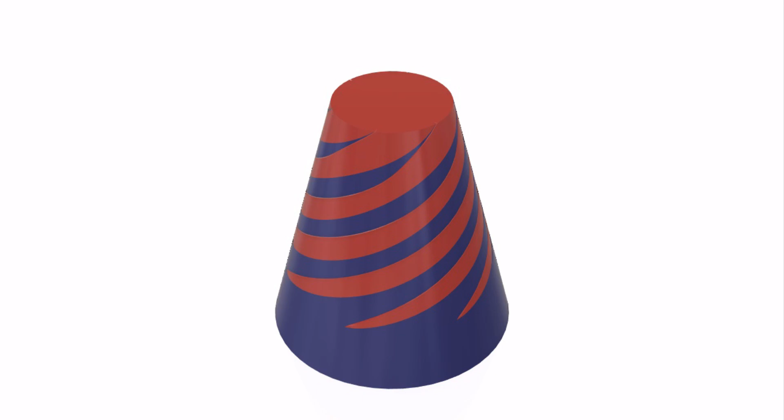We'll start by designing a fidget cone for 3D printing and finish by creating this simple animation. Keyboard shortcuts will appear in the bottom left corner as they're used.

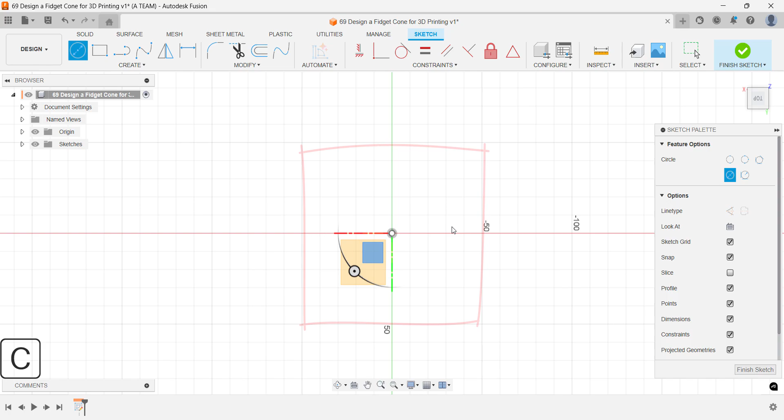We'll start this Fusion project with the center diameter circle, sketched around the origin on the predefined horizontal construction plane. The exact dimensions aren't critical. You can use your own if you find my 80mm base too big or too small. Save time by going straight from the sketch environment to the extrude command without closing the sketch.

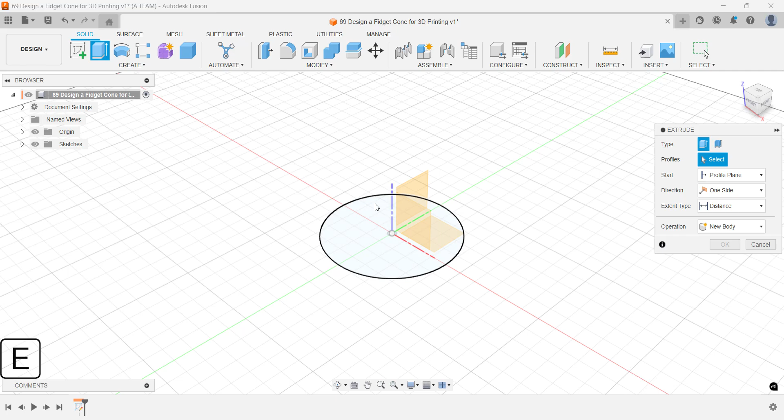I'll extrude it 80mm and set the taper angle to -15 degrees so it narrows inward. I'm not focusing on perfecting the top design at this stage. We need 2 copies of this body, both positioned in the same spot. Using the usual copy-paste shortcuts in the browser works perfectly. Just paste and press Enter to confirm without moving the body.

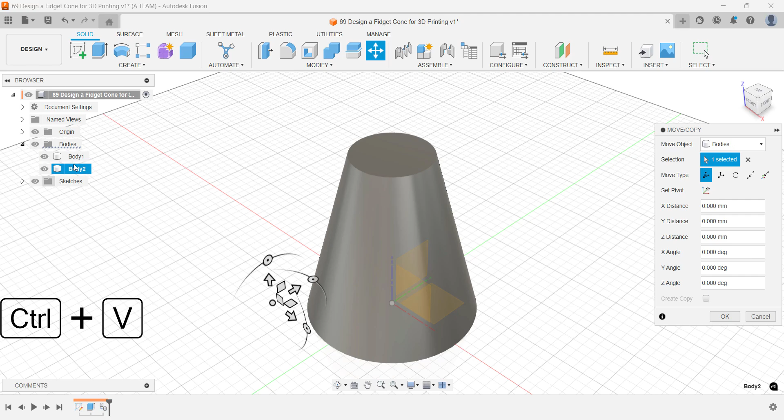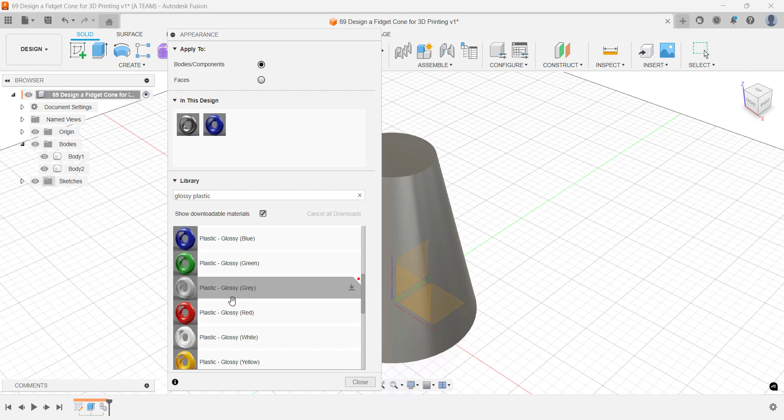Having 2 identical bodies in the same spot increases the chance of mistakes. So I'll apply 2 different glossy plastic appearances to make it easier to follow visually. Adding the colors through the browser saves time, as both bodies are in the same place. I can apply appearances quickly without the need to show or hide bodies. Body 1 is the blue body and body 2 is the red one. We'll keep body 2 hidden and continue working on body 1.

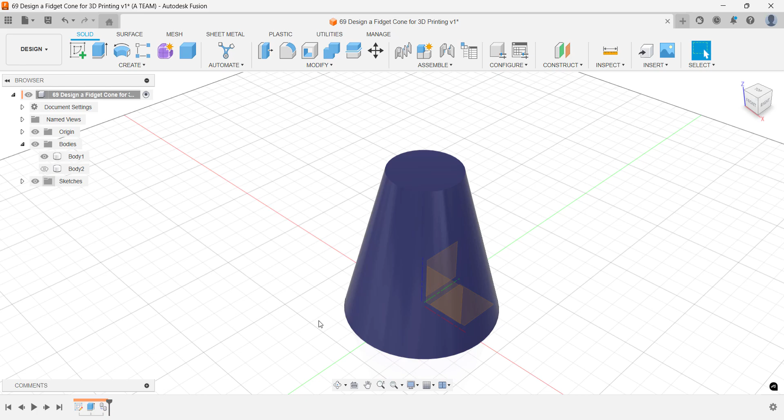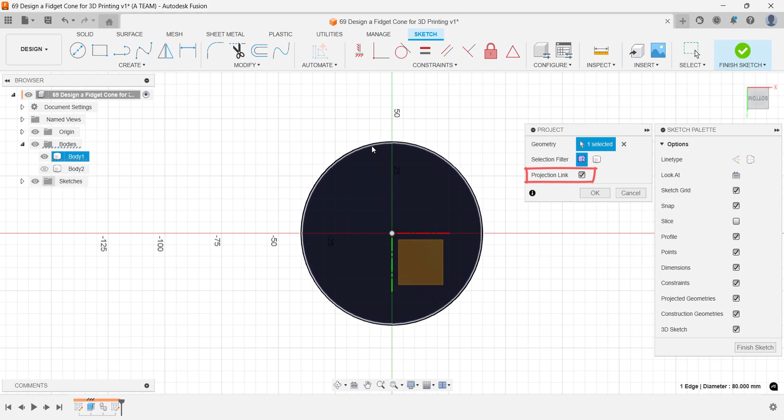We'll continue working on the bottom of the design. I'll create a linked projection on body 1. This way, if we update body 1, the earliest body in the timeline that body 2 is based on, the projection will update automatically. Projecting the boundaries from body 1 isn't strictly necessary, but it helps keep everything connected and makes it easier to locate body 1's exact boundaries.

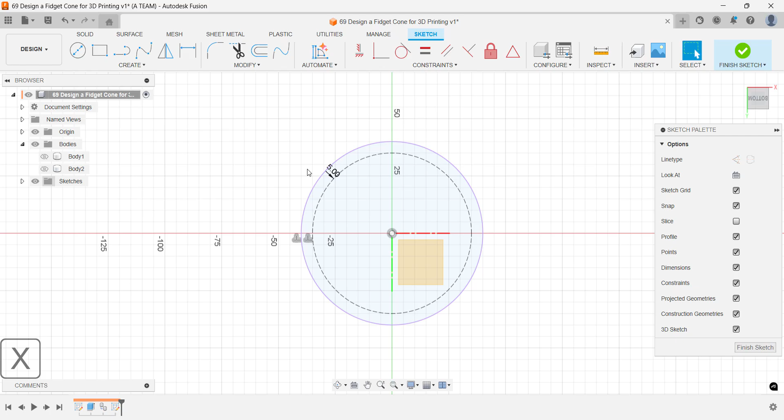We're offsetting this projected sketch by -5mm to keep our next closed sketch profile from reaching the edge. Otherwise, it would remove too much material later on. You'll see why soon. Since this offset circle isn't part of the actual design, I'll select it and turn it into a construction line. Think of it as a guide that doesn't affect the 3D geometry.

We need guidelines for our upcoming sketch that will cut through the fidget cone. Start at the origin and sketch them outward. The length and angle don't matter yet. Once the lines are in place, you can dimension them either with an angle or using a formula. This is a design choice. I'm dividing my circle into 12 sections, which gives me 30 degrees per segment.

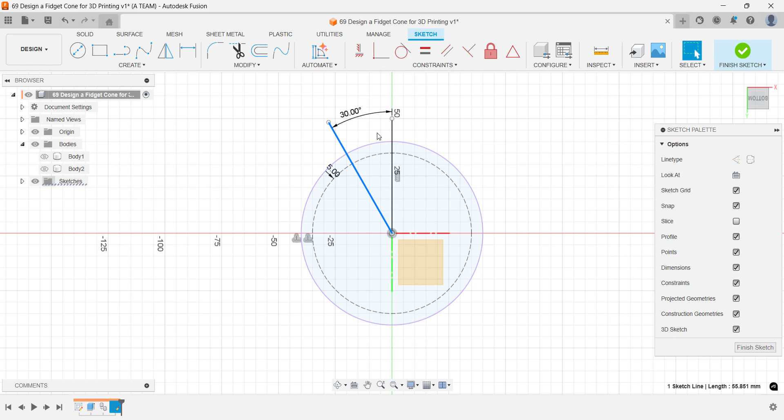Since these lines aren't part of the final design, I'll turn them into construction lines. As usual, I prefer using shortcuts, but you can also find the option under the line type setting if you'd rather click. Now it's time to get creative with a fit point spline. I'll share some key tips, but I won't spend time perfecting or fine-tuning the sketch. No one sticks around to watch that part.

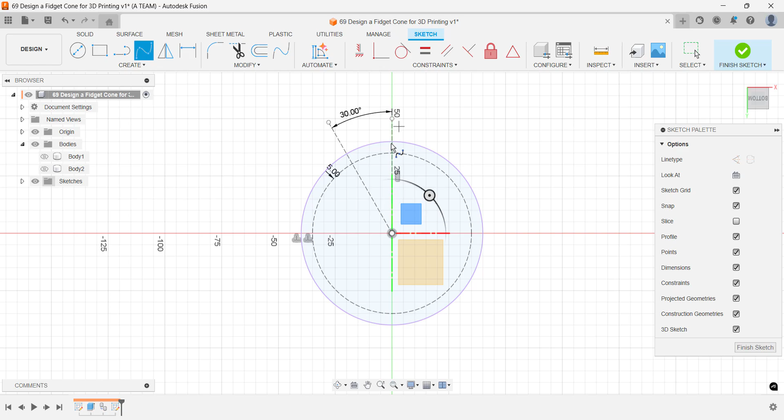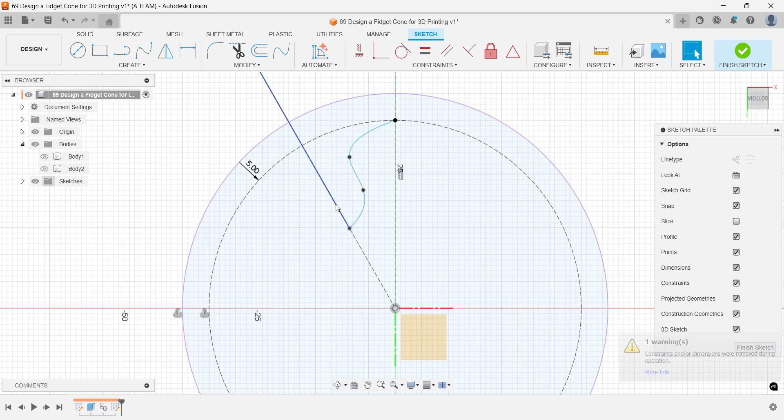We'll start by roughly placing the spline, then break the construction line on the left side since part of it needs to be part of the closed profile we're creating. The break command suggests a good breaking point and will convert that segment into a regular line. And yes, some of you might be thinking it was unnecessary to turn the left line into a construction line in the first place. That's true, given that we deleted the part we didn't need.

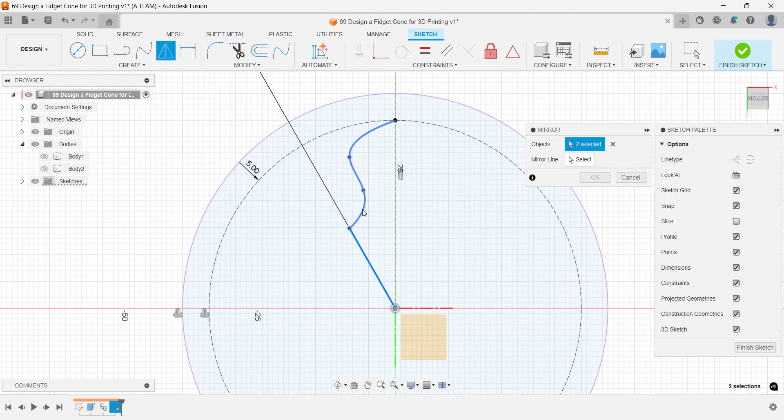Use the mirror command in the sketch environment. Select both the line and the spline as your objects and use the vertical construction line in the middle as the mirror line. Once you press OK, you should have a closed profile. The nice part is you can adjust the entire sketch, including the mirrored side, just by editing the original line and spline.

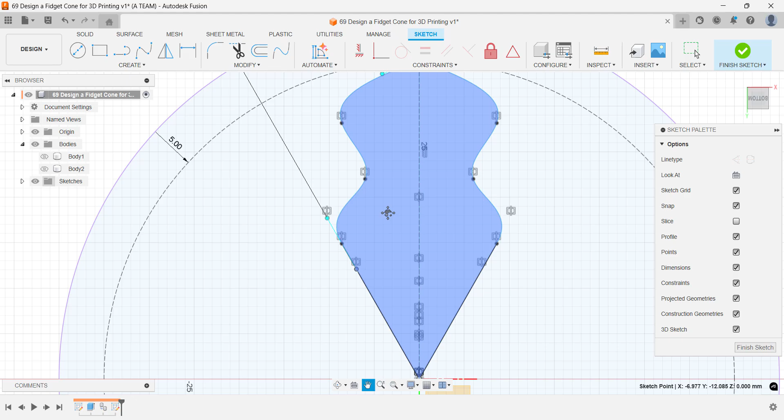One thing you should definitely be aware of is the ability to adjust the spline curvature using the green handlebars. This tool is intuitive and fun to use, allowing you to keep the number of spline points to a minimum while still maintaining plenty of flexibility.

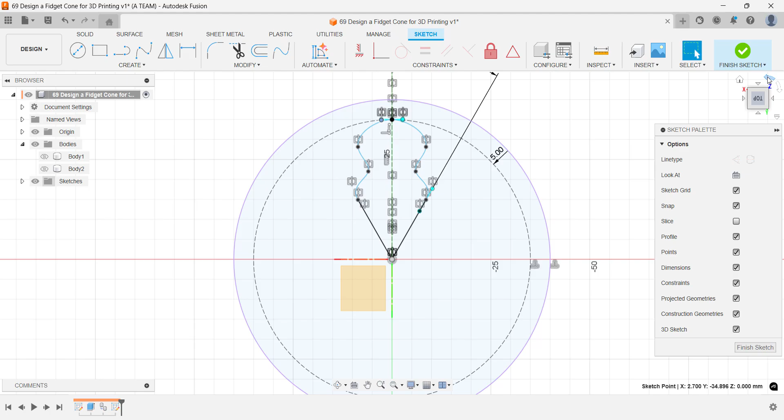You're on the right track if you have a projected circle linked to the original cone body, an offset inner circle turned into a construction line as a limit for your sketch, and a closed profile that resembles the one we're aiming for. We need a line with the same height as the cone for upcoming commands.

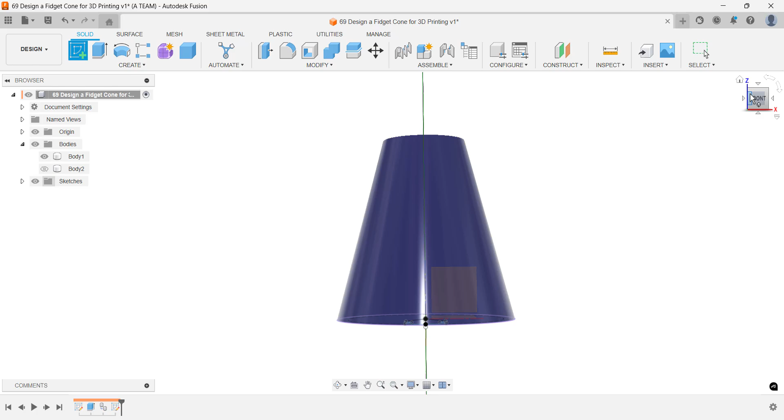I'm setting it to 80 mm, the same height as the cone, but it's not linked to the cone, meaning future changes would require adjustments in different parts of the model. While outside the scope of this tutorial, it's worth mentioning that incorporating user parameters into the design would allow us to update multiple parts with minimal input.

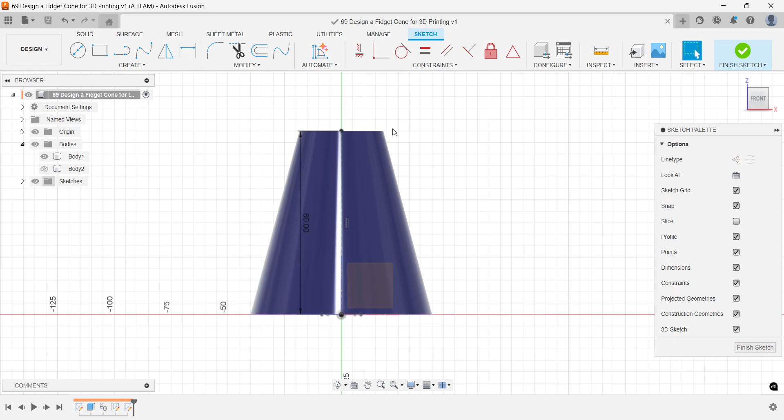I'm turning this line into a construction line out of habit since it isn't part of the design, but in this case, it doesn't make a difference. You'll achieve the same outcome if you leave it as a regular line. This is the perfect time to save your project just before we dive into advanced modeling commands. Use the solid modeling sweep command to sweep a closed profile. Simply select the mirrored profile and then your newly created line as the path.

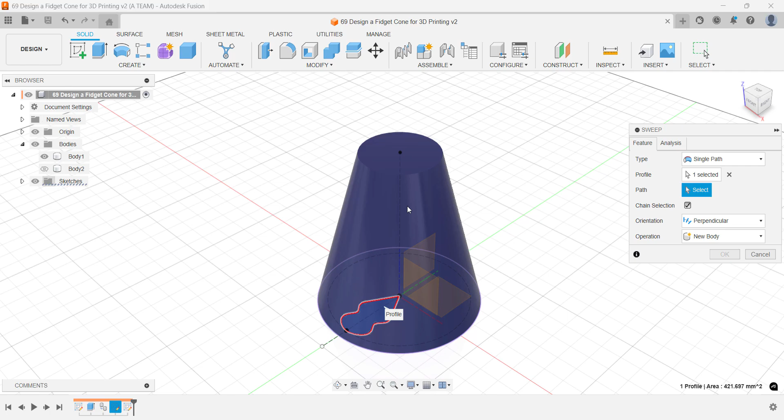The cut operation is what we want, but you'll also need to set a twist angle. I set mine to a full 360 degrees, but feel free to experiment with different solutions as you perfect your fidget cone. The profile only starts cutting through the edge of the cone once we reach a certain height. This is why I didn't create a closed profile that extends all the way to the edge of the projected

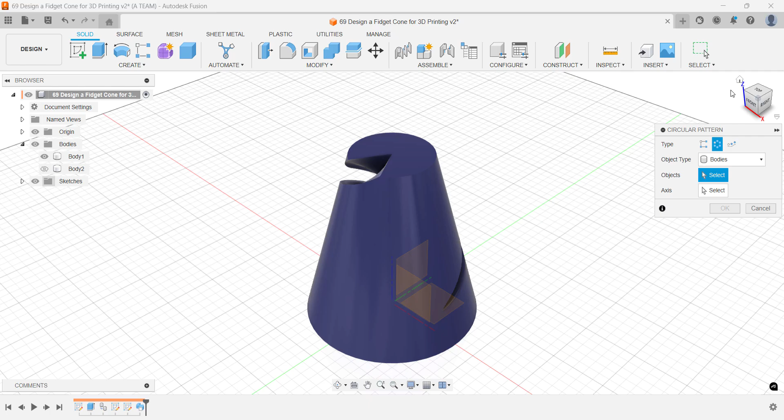line. The 5 mm distance used in this tutorial isn't optimized. The focus here is on the overall workflow. You're encouraged to try different dimensions and see what works best for you.

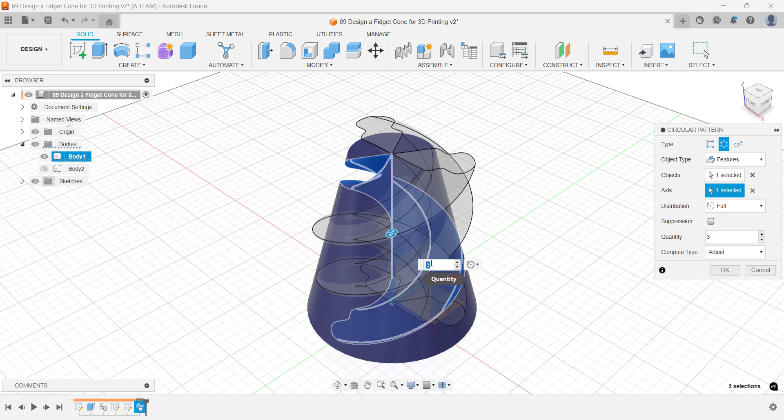Use the blue axis or select the vertical line in the middle of your body by clicking the edge with your left mouse button when the small menu pops up. I'm setting my quantity to 6, but I've seen other tutorials where different quantities are used for fidget cones.

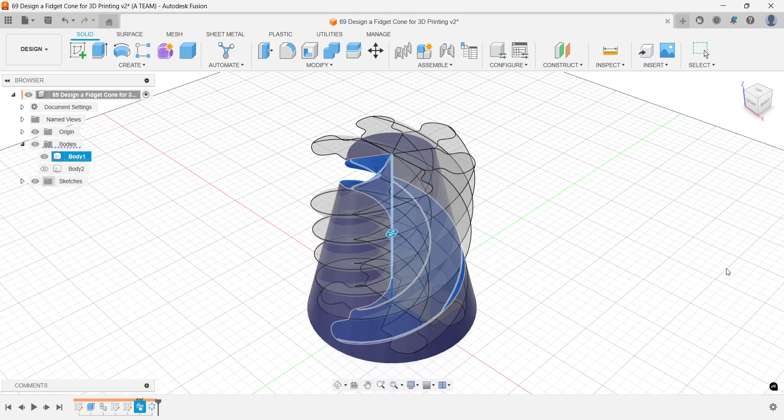Your computer might take a little time to compute this complex sweep cut operation and evenly distribute the circular pattern around the model. This is why I recommended saving earlier. Depending on your computer's capabilities and the complexity of the model, heavy computations can increase the risk of a crash.

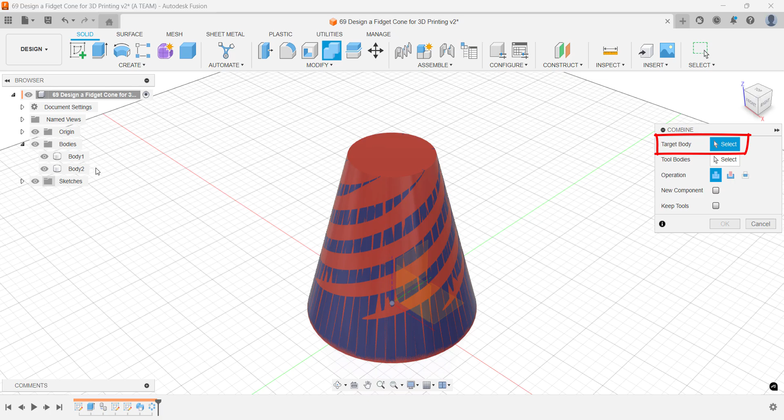When you turn the visibility of the red body 2 back on, you'll notice conflicting areas in the geometry. Specifically, the red striped red and blue regions overlapping. To resolve this, use the combine cut operation. Set body 2 as the target body, since it's the main body we're modifying.

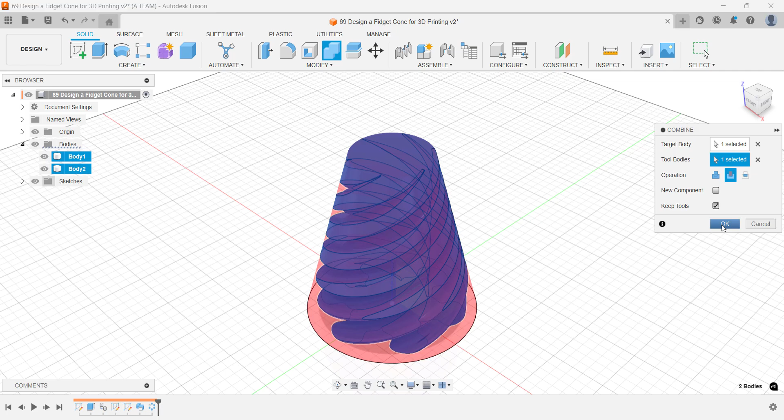Body 1 will act as the tool body, as it has more developed geometry compared to the original cone. Make sure the operation is set to cut, because we want to remove material. Also check Keep Tools. We want to keep body 1 as part of the design. Once applied, the overlapping areas should be gone.

However, you may still notice that body 1 and body 2 fit too tightly. For proper assembly or function, we will introduce small gaps between them for clearance. I'm saving my project at this point to have a version backed up before performing this operation.

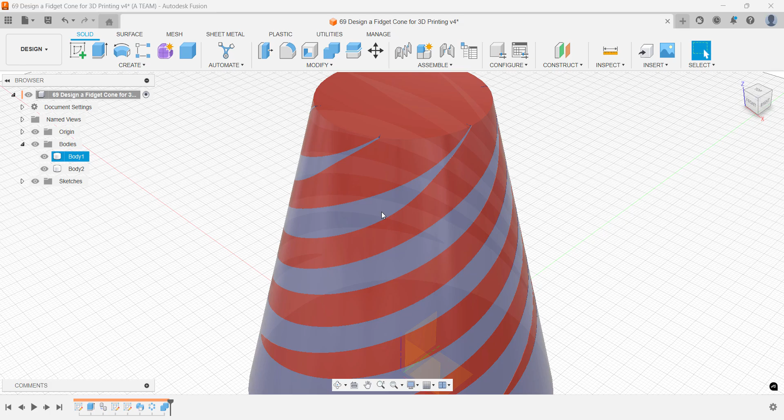We're doing this because we need a small gap between the red and blue bodies. If you look closely, you'll notice they're currently too tight due to the previous steps. To fix this, we'll hide the red body again and start a press-pull operation.

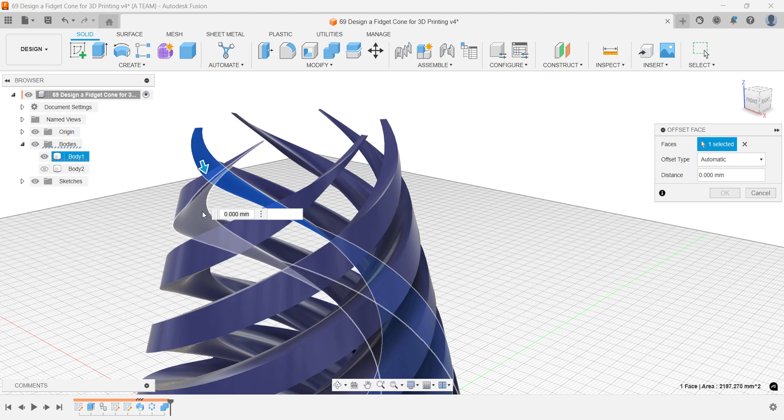Here, I'm selecting just one side, but the exact distance you choose depends on several factors, like your design, your 3D printer, its settings, and the materials you're using. Be sure to check from different angles to ensure you've selected all necessary areas before applying the adjustment.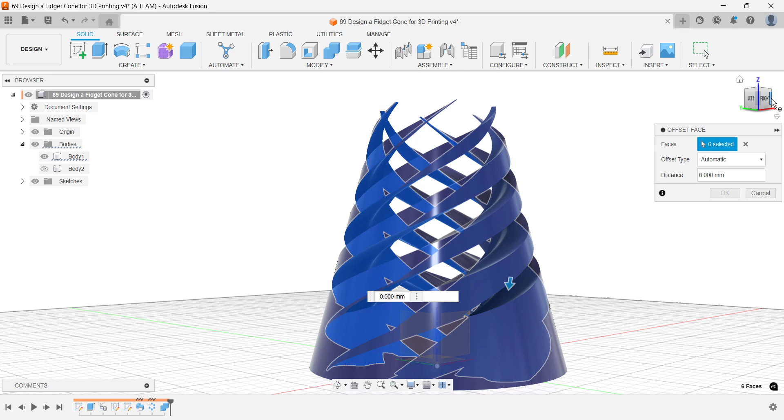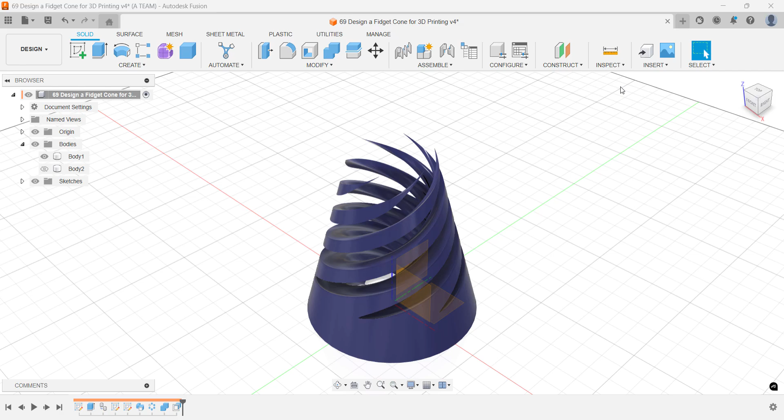I'm setting the clearance to negative 0.2 mm and you'll see the complex computation begin right away. This computation took about a minute on my system, so we'll skip ahead and continue with the 3D modeling. Turn the visibility of body 2 back on and inspect your model. You should now see a small clearance between the parts, giving the bodies a better chance of fitting together properly.

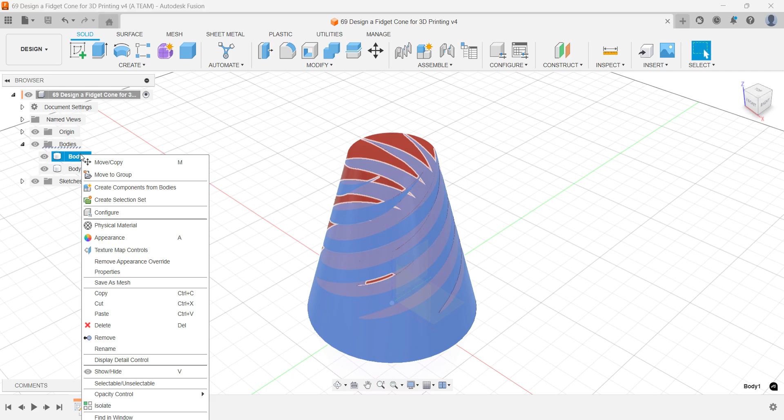Next, we'll convert both bodies into components and animate them in the animation workspace. A quick way to do this is by selecting each body in the project browser, then right-clicking and choosing Create Components from Bodies from the context menu.

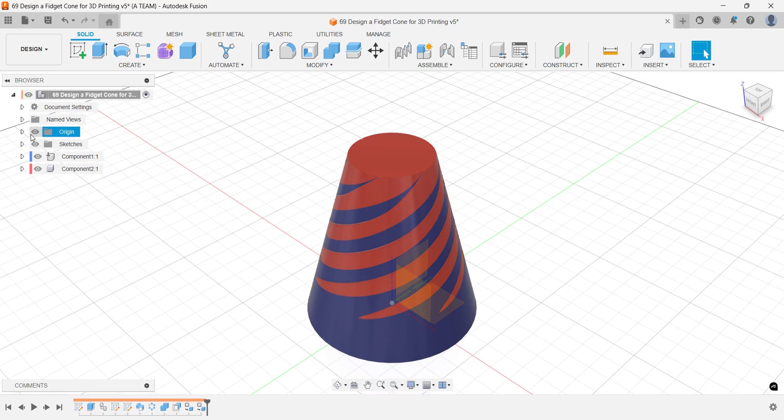The settings carry over from the design workspace to the animation workspace. Since I don't want the origin to be visible, I'll quickly jump back to the design workspace and turn off its visibility. The animation workspace is straightforward and we'll keep things simple in this tutorial.

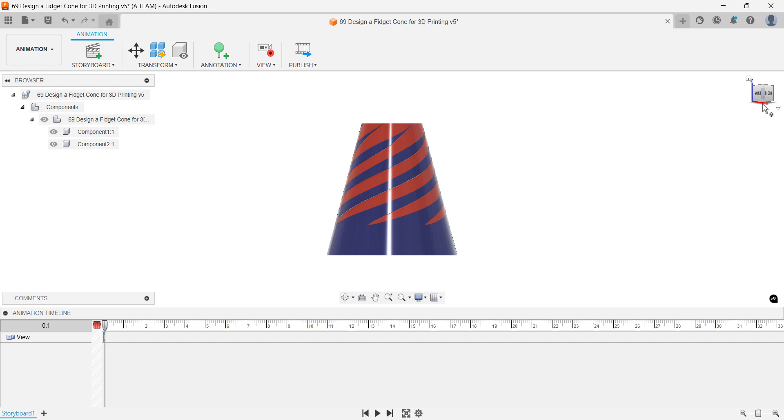We'll begin by setting the camera angle for the start of the animation. The recording will start from this angle. Next, I'll set the duration for the first action. I'll set it to 10 seconds. The animation starts with the initial camera angle and ends with the updated camera position after setting the duration.

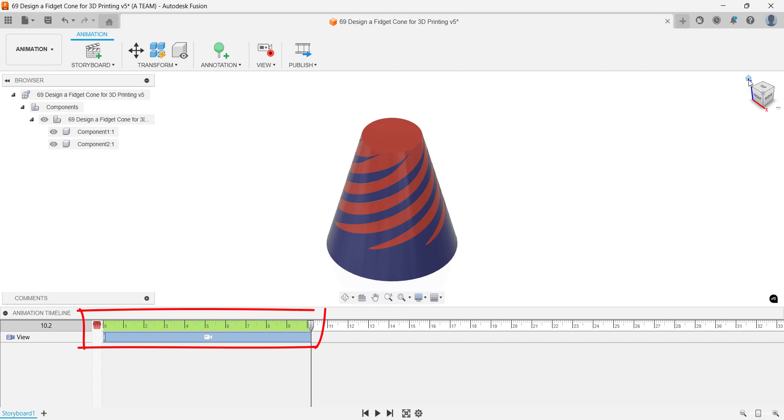The green bar indicates that the recording is active. You can use the play button to preview the animation so far. The camera movement is in place. Now let's add some part movements. Next, I'll animate the upward movement separately.

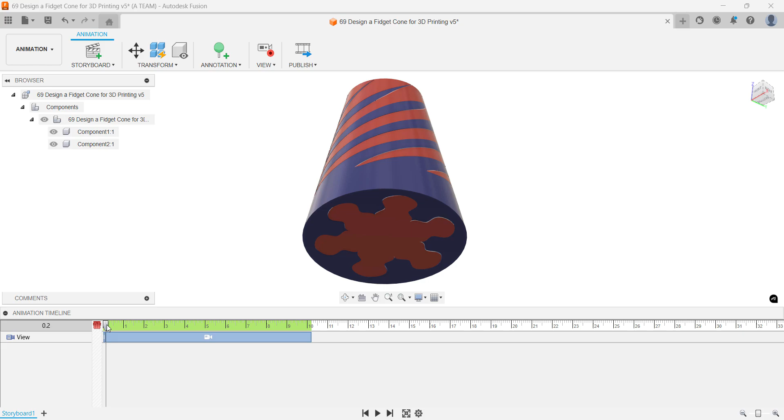Body 2 starts at the bottom at the beginning of the recording, so we'll set the timeline to the end of this 10-second duration and position body 2 where we want it to be. I'll set the height to 80 mm, which is the height of the cone.

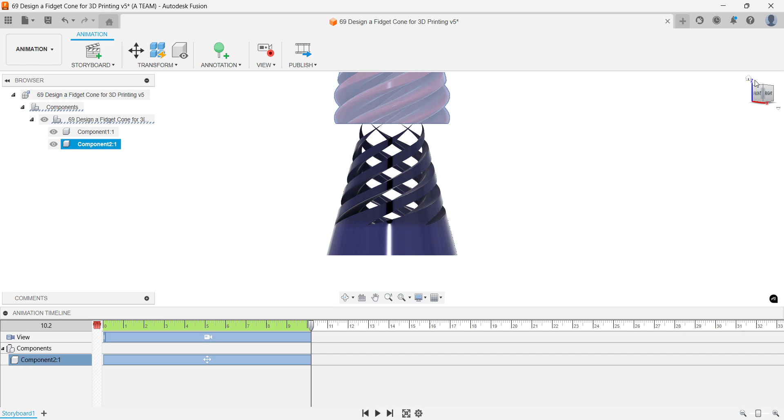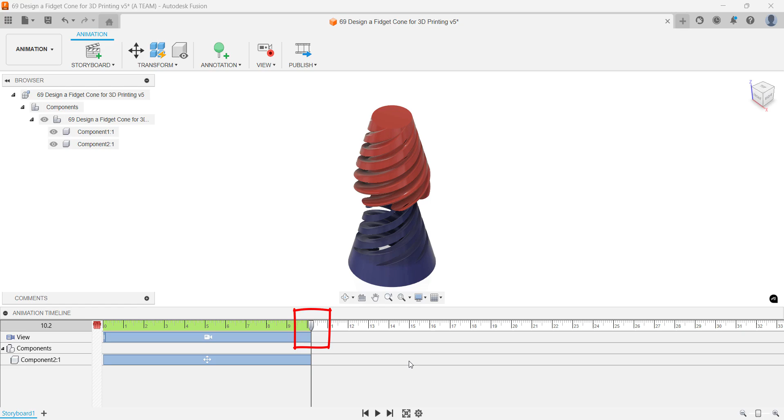Everything looks good, so now we'll set up the rotation. We're already at the end of this recording duration, so we'll now tell Fusion to apply a 360-degree rotation at this point. This matches the rotation used for the sweep command's twist angle 6 minutes and 20 seconds into this tutorial.

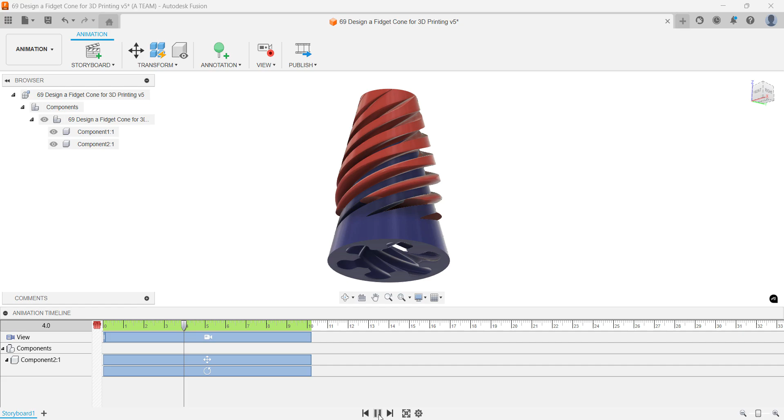The preview looks good, everything seems correct, and we're ready to publish the video. Publishing is simple. Just hit publish, choose your settings, press OK, and select the location for the export in the upcoming steps.